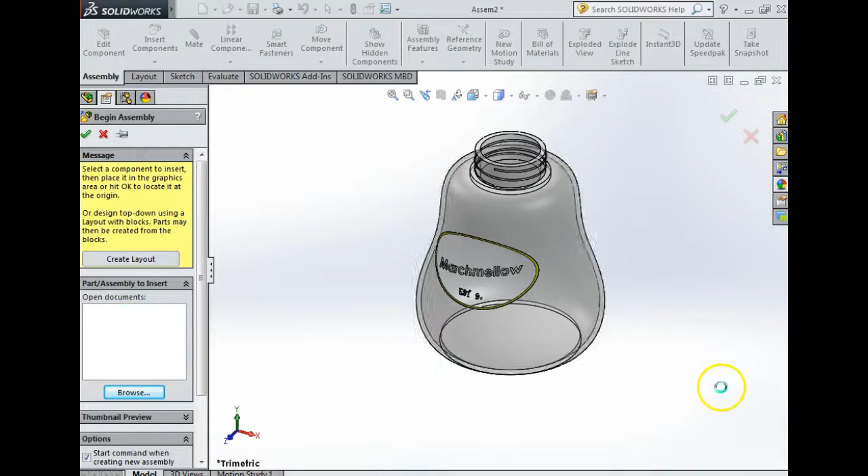So I'm going to put in the jar. I'm going to go browse and find the jar, go into where it's saved and click on it. And we click anywhere to stop. Lovely, so there's my jar there.

Now the next thing I'm going to bring in is my lid. I go up here to assembly and say insert components, and I'm going to bring in a jar lid. Now the jar lid obviously still moves.

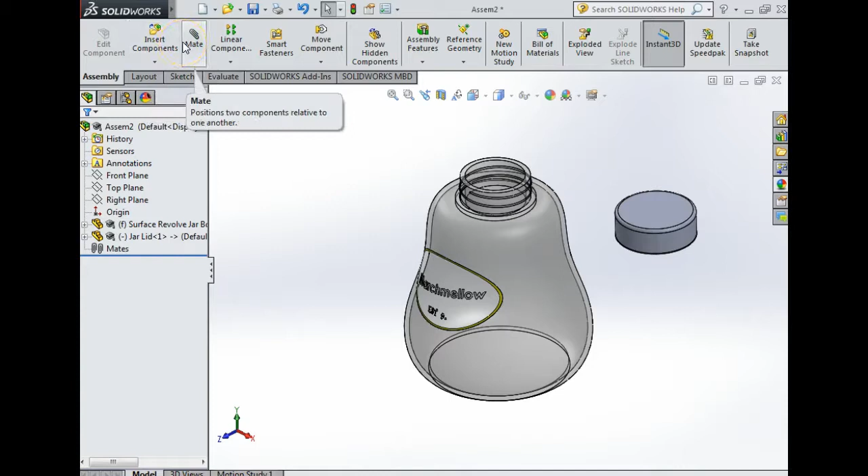So I need to mate it. If you look at mate, it's a picture of a paper clip, and a paper clip keeps things together. So I'm going to click mate.

Now I'm going to click in here. See the cylinder that's on the inside? I'm clicking the cylinder on the inside. I'm going to zoom out, go into the lid, and click the cylinder on the inside of the lid.

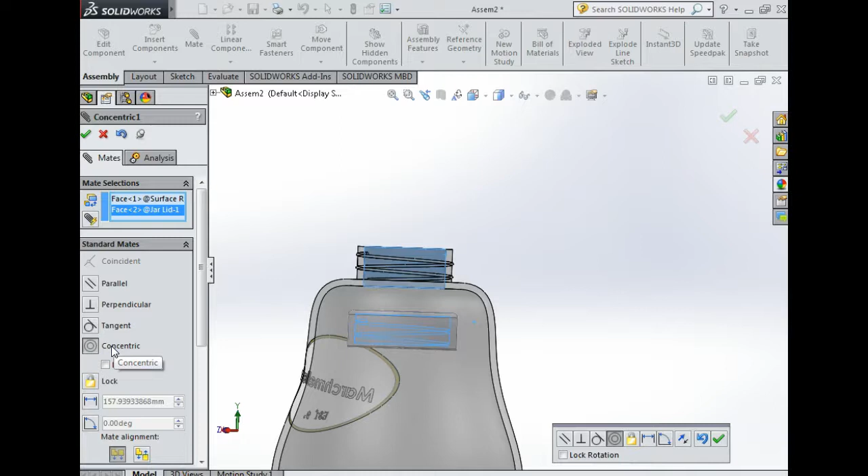Now the computer is clever, it makes a concentric mate. As we know, concentric means they share the same center point. So I'm going to say yes to that, and now I should have a lid that will go horizontally and vertically up and down.

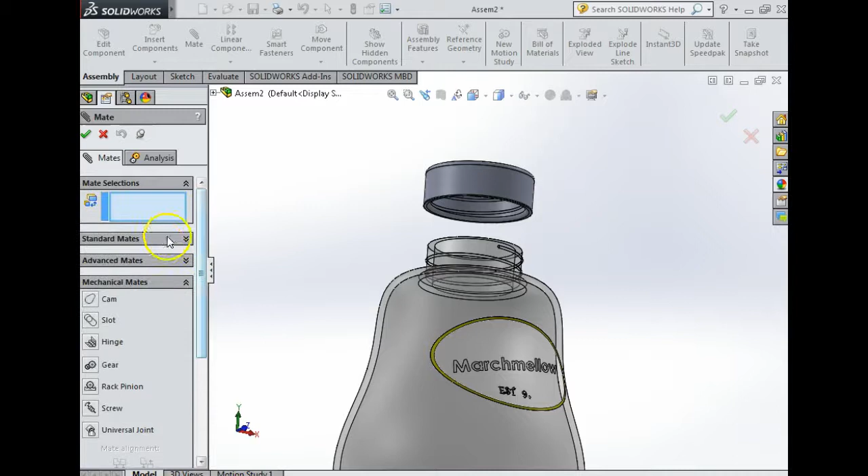Perfect. Now the next thing I want to do is we have different options. If you go into mate, advanced mates, mechanical mates, there is a screw mate, but for the moment we're just going to do a normal standard mate. I'm going to zoom in here.

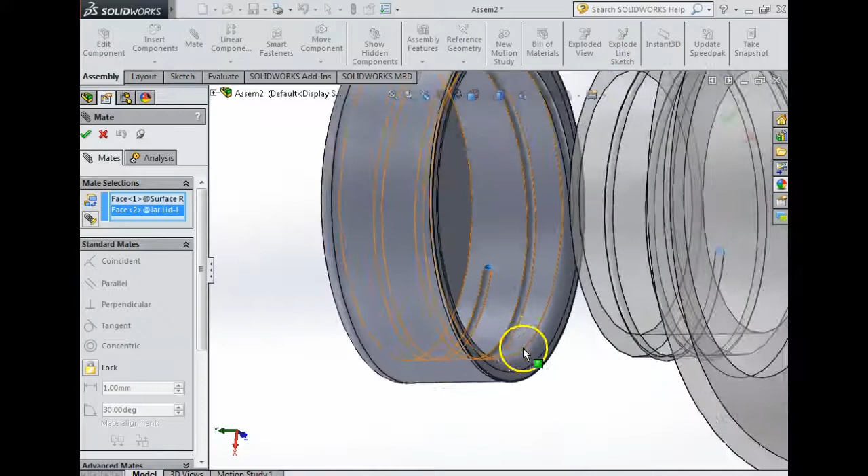Now if you look here, I have a circle that has been created. I'm going to click on that circle and see if I can find the corresponding circle up here, just by rotating it around, and that should give me the corresponding circle here. So I'm going to select that as well. Now by selecting them, what the computer has done is just lined them up. So I'm going to say yes to that.

It's not going to let me select them because they're domes. So this is just an example of what you cannot do. Let's delete those two faces.

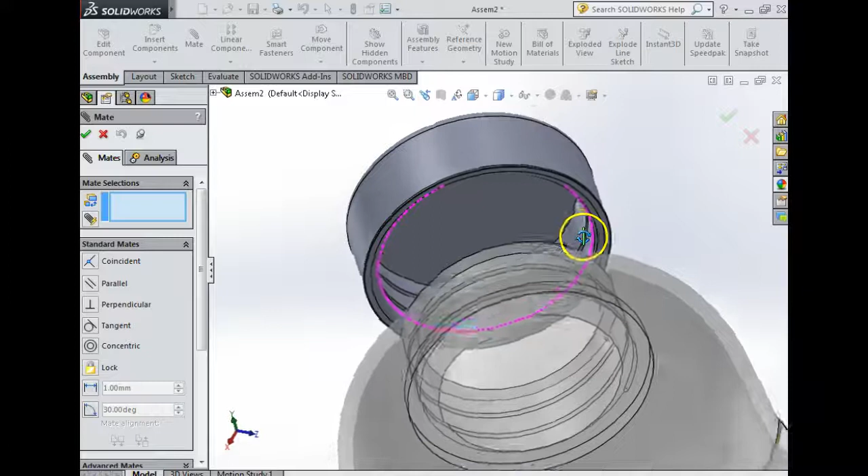And let's see if there's any other faces that will be beneficial to me working on this. If I come back up here, I have a point. So if I click the point and click the corresponding point down here, the computer automatically puts the two of them together. So I'm going to say yes and yes.

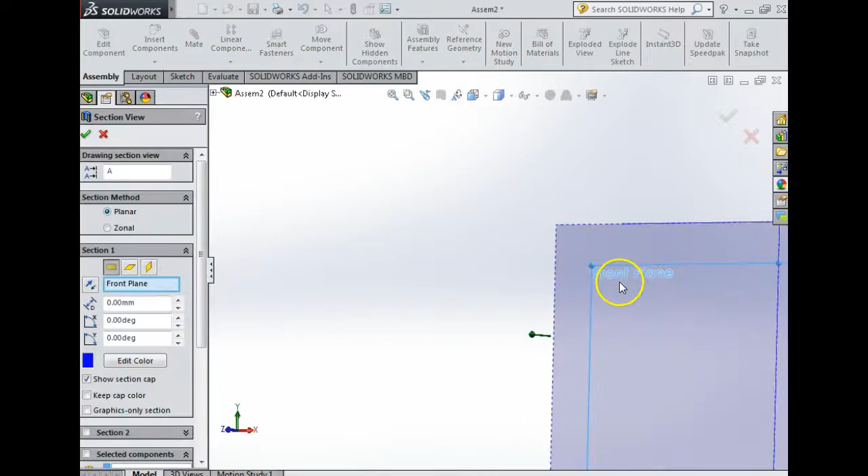Now from the outside, they look like they're going together, but just to double check, we'll go section. If I section them and pull in, you'll see that the screw thread they share is the exact same the whole way around. So they have joined in a perfect screw thread. We're after making this assembly as if these are totally and utterly connected. So I'm just going to get out of that section.

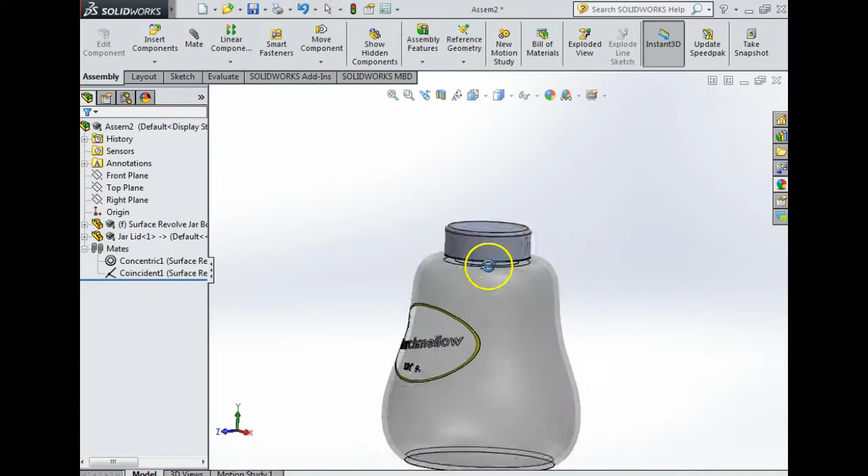Now I want to do some changes to the materials. It is very important you never change materials in the assembly, never. So I need to go into the part.

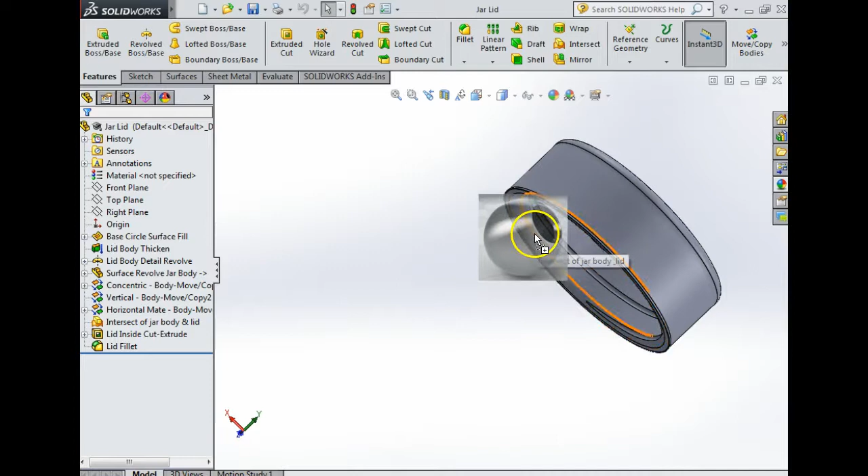So I'm going to right click on the lid and say open part, and click over here on the beach ball. Plus the plastic, I'm going to go into metal, and go chrome, and go brushed chrome. Click on this. Now that would give me the face, the intersection, the body. I want the entire part, so click that, press save, X out, and now you can see that's lovely in chrome.

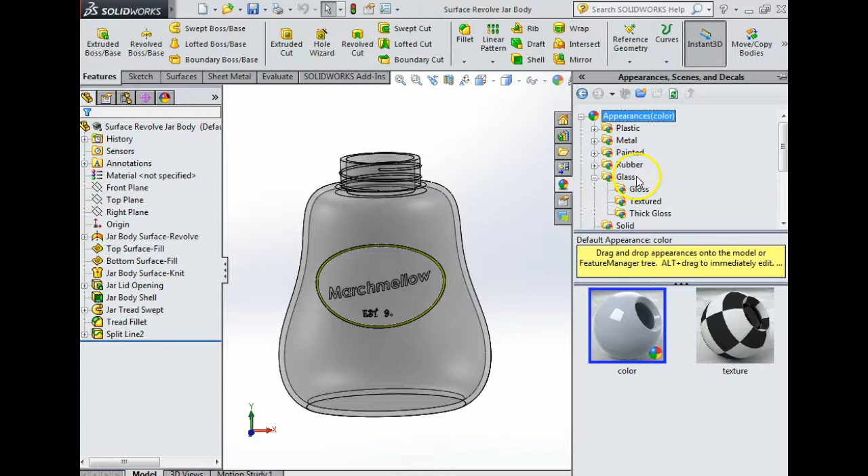I'm going to right click on my jar and go into it to see what material we have here. I think I made it glass. So I'm going to go textured glass and make it frosted actually. So that's the whole part I want frosted, lovely.

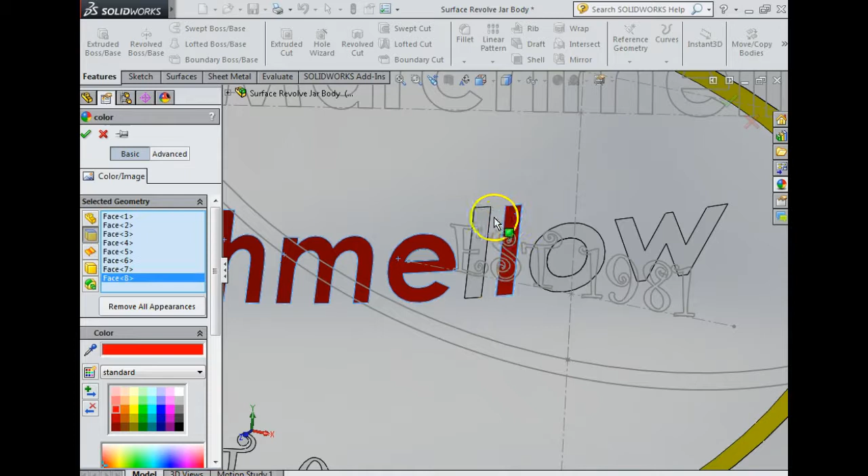The next thing I'm going to do is come up here to my writing. I'm going to click on this and click face, and for the face I'm going to make it red. I'm just clicking all the faces, and say yes. We're going to save that as well, X out there, and as you can see now, there is the glass completely assembled and completely finished.